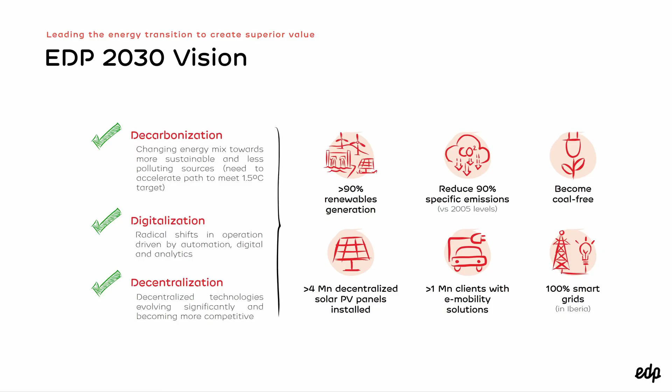We want to lead the energy transition, and for that our vision for 2030 is decarbonization, digitalization and decentralization. And for that we aim at having 90% renewable generation, reduce by 90% CO2 specific emissions, become coal-free, have more than 4 million decentralized solar panels installed, more than 1 million clients with e-mobility solutions, and 100% smart grids.

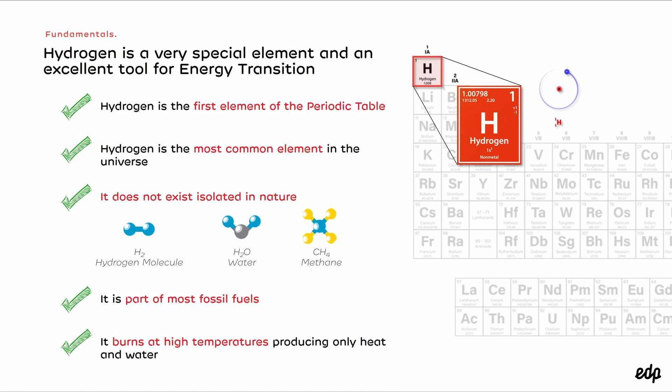Now speaking about hydrogen, hydrogen is a very special element and an excellent tool for the energy transition. It is the first element of the periodic table. It is the most common element in the universe. It does not exist isolated in nature. Two atoms of hydrogen make one molecule of hydrogen. Two atoms of hydrogen plus one atom of oxygen makes water. Four atoms of hydrogen plus one atom of carbon make methane.

Hydrogen is part of most fossil fuels, and most important, it burns at high temperatures, producing only heat and water. The name hydrogen comes from the Greek and means maker of water.

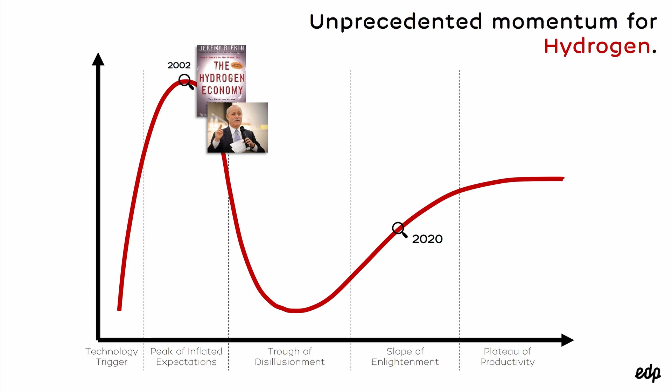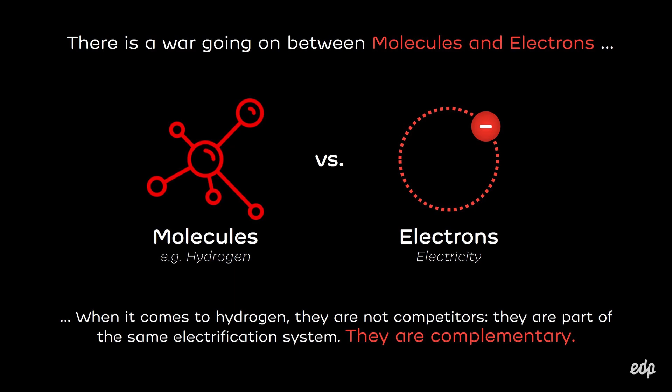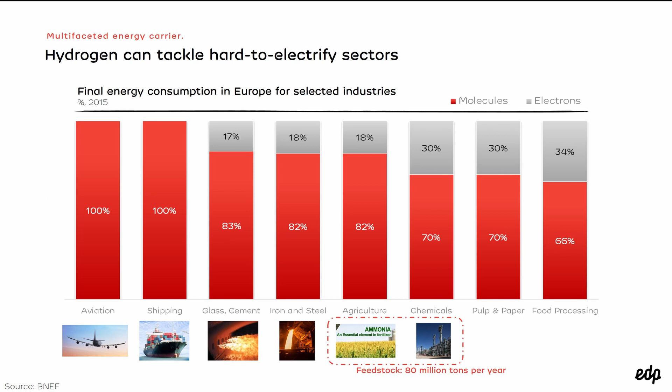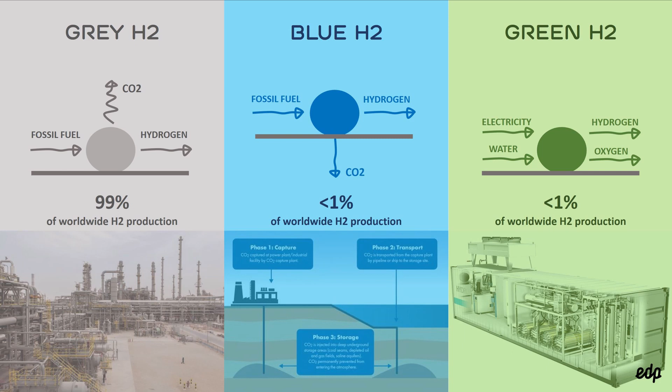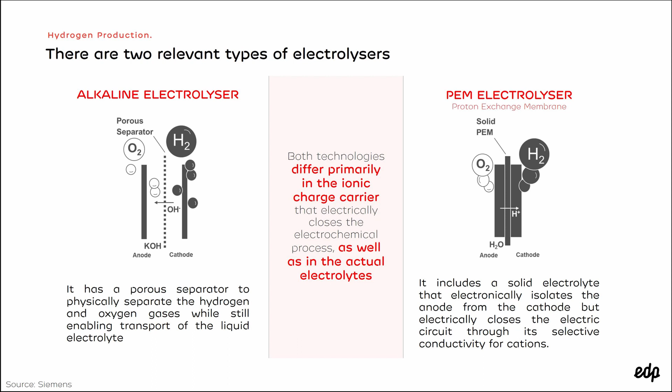Hydrogen is produced from water with electricity with two types of electrolyzers: the alkaline electrolyzers and the PEM electrolyzers. The alkaline electrolyzer has been around for some 100 years. It is quite mature, but it has still to scale up to reach present demand. The PEM electrolyzer is the one on which many people are betting these days and brings in the promise of more efficiency and less cost. Both differ primarily just on the ionic charge carrier, as well as in the actual electrolytes used.

First, before we proceed, some back of the envelope figures. If we take 55 kilowatt-hours of electricity and 9 liters of water and feed them into an electrolyzer, we get 1 kilogram of hydrogen and 8 kilograms of oxygen.

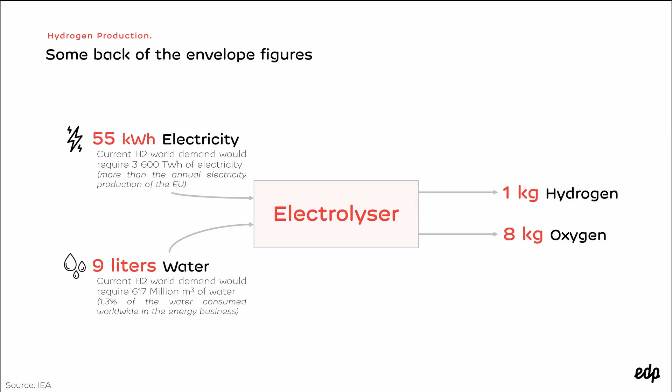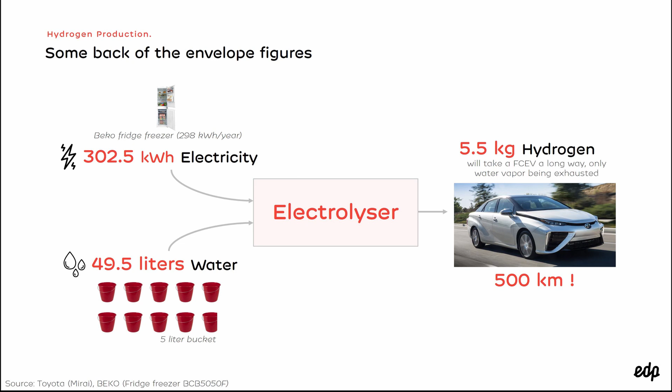Another example, this one on mobility. If we take 302.5 kilowatt-hours of green electricity, add to it 10 buckets of water, around 50 liters, and feed them into an electrolyzer, we make 5.5 kilograms of green hydrogen, and that takes a fuel cell electric vehicle 500 kilometers. Isn't that amazing?

Let's recap. First, green hydrogen can be made from renewable energy by using electrolyzers. Second, hydrogen has high energy density. 1 kilogram has 33.6 kilowatt-hours, which compares quite favorably with diesel, with just 13 kilowatt-hours per kilogram, and much more with the lithium-ion battery, with just 0.2 kilowatt-hours per kilogram.

But bear in mind that hydrogen has very low specific mass at normal conditions. 1 liter of hydrogen is just 0.09 grams. It means that to have 1 kilogram of hydrogen at normal conditions, I need 11,000 liters. And this does pose a challenge, because to be of any practical use, we'll have to compress the hydrogen.

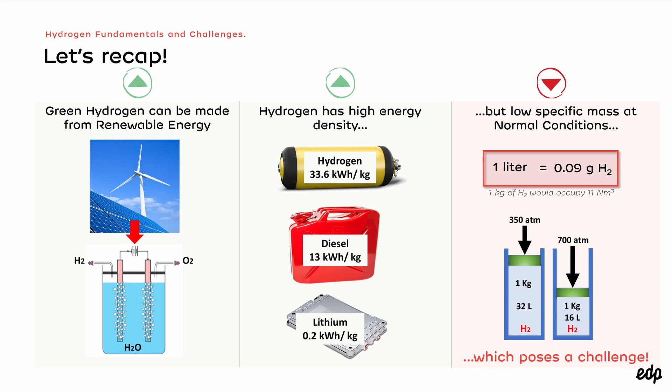Typically, we compress the hydrogen at 350 atmospheres or 700 atmospheres. That is what is used in mobility. Cars use 700 atmospheres to save space. Coaches, buses and trucks typically use 350 atmospheres. And then we can put 1 kilogram of hydrogen in 16 liters, or 32 liters at 350 atmospheres.

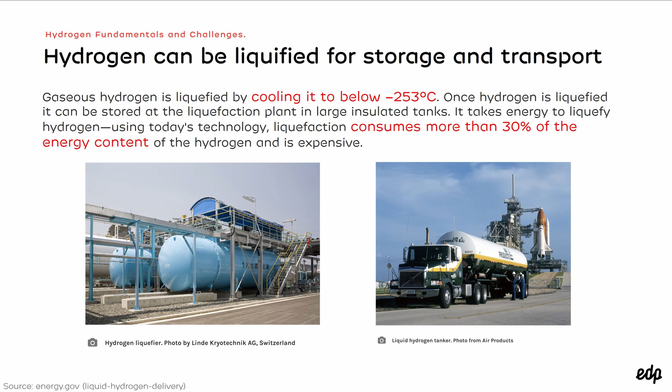Other than being compressed, another solution is to liquefy the hydrogen. Here again we have a challenge, because to liquefy the hydrogen we have to cool it to below minus 253 Celsius. That is just 20 Celsius above the absolute minimum. And this operation consumes more than 30% of the energy content of the hydrogen. However, if we want to carry the hydrogen very far away in a truck or in a ship, this may well be the best solution.

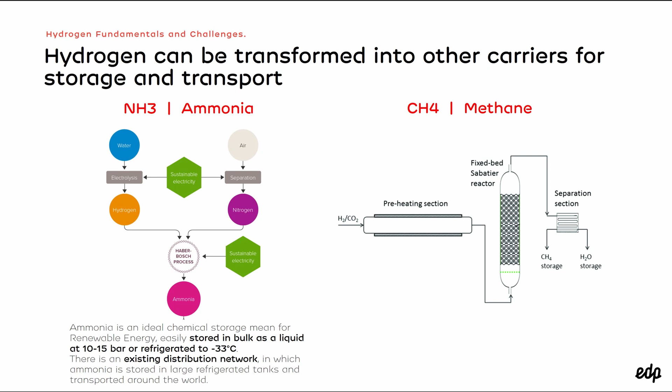I would like also to point out that hydrogen can be transformed into other carriers for storage and transport. Typical ones are ammonia, which is NH3, or methane, which is CH4. The processes have been around for years. To make ammonia you use the Haber-Bosch process. Typically to make methane you use a fixed bed Sabatier reactor. And again, other than being carriers, both ammonia and methane are also products which can be used as feedstocks for many industries.

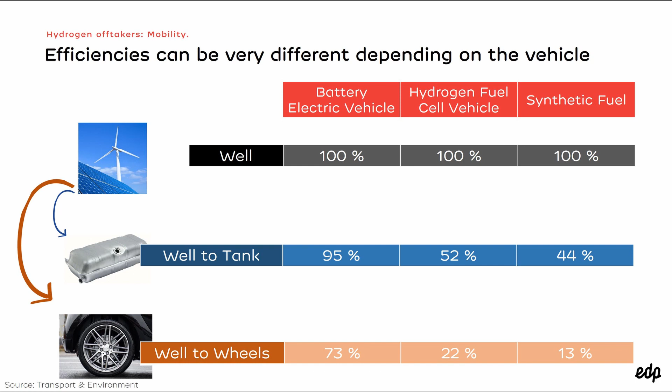We have been speaking about different carriers. Hydrogen, like electricity, is not a source of energy, it is a vehicle or carrier of energy. And here I would like to point out that the efficiencies measured from the generation to the wheels, normally called well-to-wheels efficiency, are quite different. Electricity is the winner, so we may conclude that whenever possible, electricity is the best carrier, because it has a well-to-wheels efficiency of 73%. Hydrogen has just 22%, and if we are using synthetic fuels, we would have just 13%.

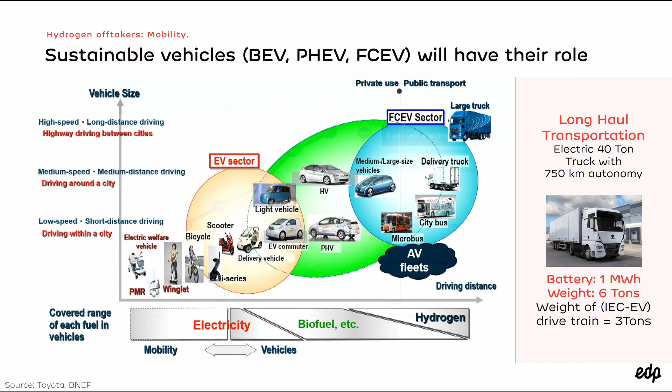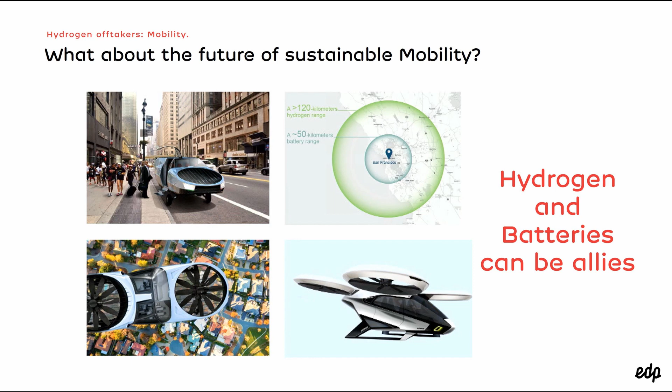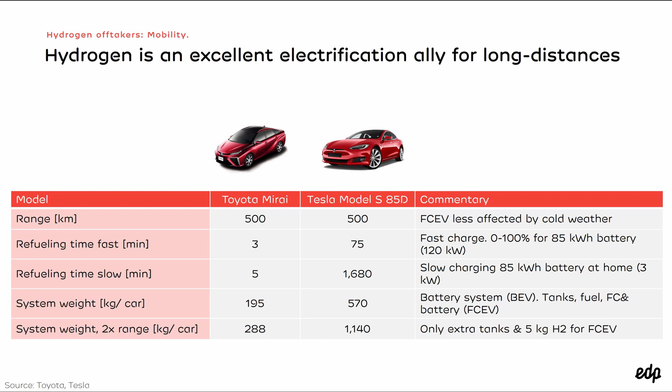Then why would I prefer the Tesla? Because electricity is much cheaper than hydrogen. I would run the Tesla much more economically than the Toyota, but above all, there are many more charging stations for an electrical vehicle than refuel stations for hydrogen for a fuel cell electrical vehicle. Therefore, presently, I would definitely prefer an electrical vehicle.

As I mentioned before, Japan has been betting on hydrogen for years, and realizing that they do not have too much renewable energy, they came up with a clever idea of importing hydrogen from countries where there is a lot of space and there are good resources of renewable energy. And so they launched a pilot called HySTRA between Australia and Japan, where the hydrogen is produced in Australia and shipped on a special vessel to Japan. It is shipped in the liquefied form.

I think this is a very clever idea because it raises the concept of exporting renewable energy. It could be considered that in summer, when the resources are huge in the northern hemisphere, renewable energy would be exported to the southern hemisphere in the form of hydrogen, and in winter hydrogen would be shipped from the southern hemisphere into the northern hemisphere.

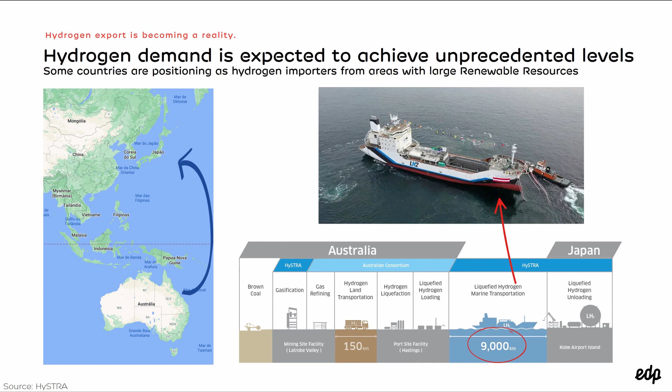In Europe, the Netherlands are having a similar vision. Rotterdam is positioning itself as the energy port of northwest Europe, and for that purpose it's considering importing hydrogen from different places in the world, namely from Portugal.

What are we doing with hydrogen at EDP? We consider hydrogen the electrification ally. The rationale behind it is that it is an important piece in the decarbonization puzzle, complementary to electrification to address hard-to-abate sectors. It empowers renewables, addresses renewables intermittency and stabilizes renewables revenue. It provides storage and flexibility, and can serve as an energy buffer and a strategic energy reserve. Our action plan is presently the following.

We are developing a power-to-hydrogen pilot project in a CCGT, and there we are testing the power-to-H2-to-power concept, which will help enhance the CCGT flexibility. We are doing an offshore hydrogen wind coupling project, with which we intend to study a solution to produce hydrogen from offshore wind at wind parks. Then we are also starting pilots of hydrogen end uses referring to mobility, trying to develop a national market there.

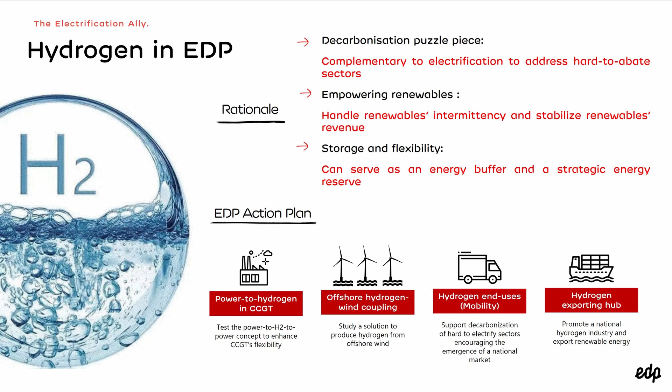And fourth, in alliance with the Netherlands, we are developing a project called H2 Sines with other Portuguese partners, where we have the vision of, by 2030, if all goes well, having installed 1 gigawatt of electrolyzers. Half of the hydrogen produced there will be exported to the Netherlands. The other half will be used locally in the petrochemical industry which exists there, will be blended into the natural gas pipeline, and will be sent by road to hydrogen refueling stations to be used in mobility throughout the country.

Now, an important question: will this have a business plan? Will it be economical? We believe yes. Presently, grey hydrogen costs just 1.5 euros per kilogram, whereas green hydrogen would cost around 4 euros per kilogram. But grey hydrogen will have a price which will tend to increase because it will have to be progressively decarbonized, becoming blue hydrogen, whereas green hydrogen will tend to decrease with the evolution of the technology.

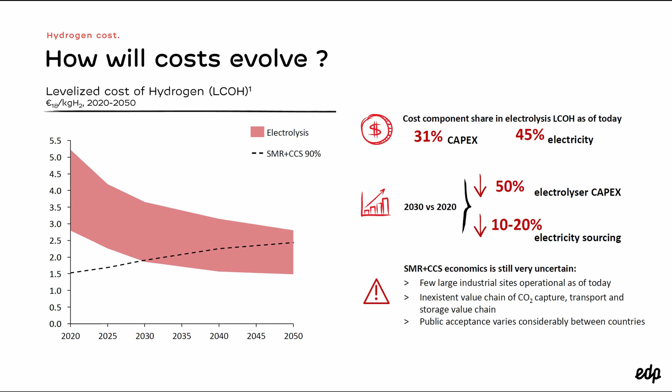And it is important to realize that the price of green hydrogen has to do with the cost of the electrolyzers and the cost of the electricity, 31% being due to the capex and 45% to the price of the green electricity. We believe that both these values will tend to decrease. The electrolyzers cost will decrease by 50% until 2030, and the electricity will decrease at least by 10–20%.

To conclude, hydrogen is a story we must write together. It is a huge bet by the EU towards decarbonization goals. There will be several good opportunities for startups. Together, we will build a better planet.